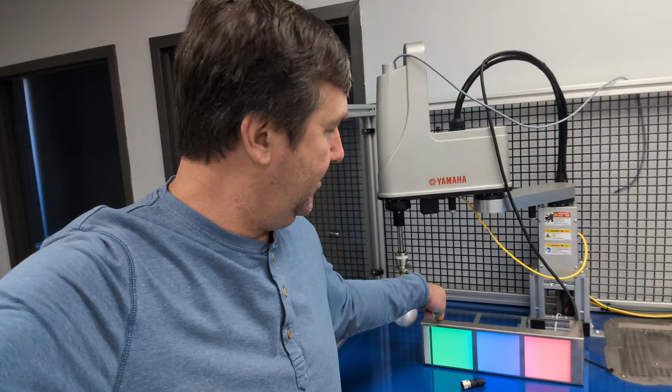So yeah, this is supposed to be an anodizing thing. Well, I guess it's supposed to be RGB, red, green, blue. Okay, I guess I don't have my order right, but I'll work that part out.

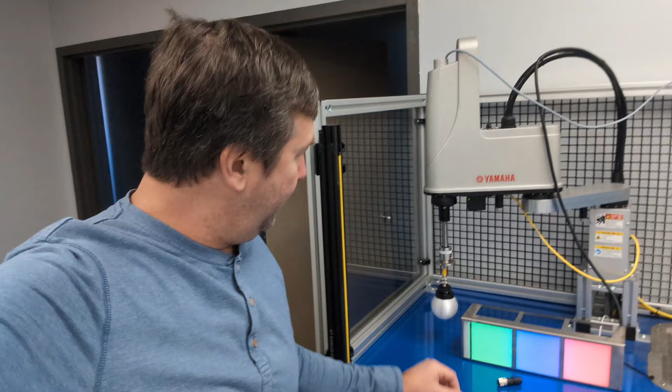I have a banner stack light kind of hanging off here, like it'll be a crane dipping something in. When it dips down into the green, it should turn green, and as you mix the colors, it will change. Later on, I thought we might even make it so if you dip it for a certain amount of time, it puts so much green into it, and a different amount in the next dip, so you can get true color variation. But right now, just trying to make it work.

And like everything we do here, you got to do it at least twice, because this part looks really good, looks like it's going to work, but we still finish parts with this.

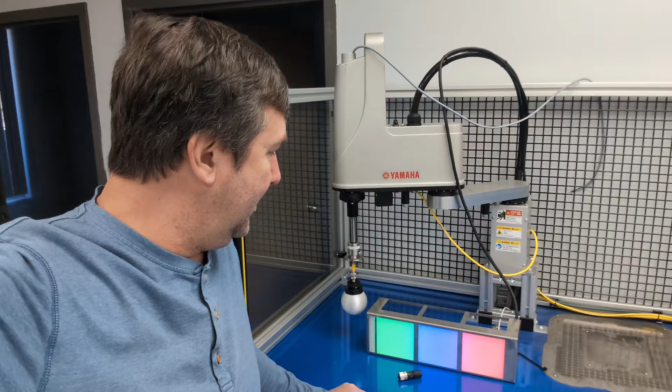So now I need to get this connector out of the way, and I can't. I need the world's smallest M12 connector, or world's smallest, but I don't think it exists. So for now I need to cut the cord off and manage to get this cable fished through.

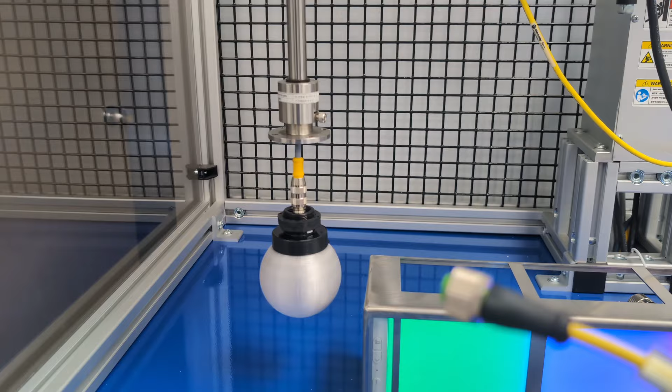That way we can just unwire this and shove it up and out of the way when we're not using it. We'll take a nice new molded cable and go ahead and sacrifice it.

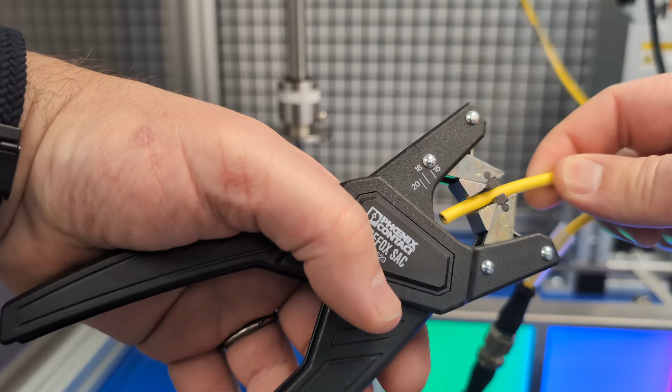I'll take my cable stripper, strip about yay much off of it. Then we were getting ready to go to the school of let's do everything twice, because I was getting ready to put the end on it, but I need to fish it through the robot first.

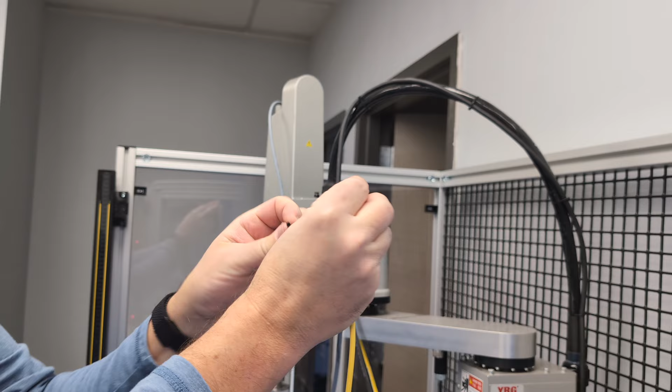So we'll take a little tape. Who knows, maybe this is in the camera, maybe it's not, but I'm hoping I can just put a little bit of tape on where the wires are stripped. That'll be nice and thin.

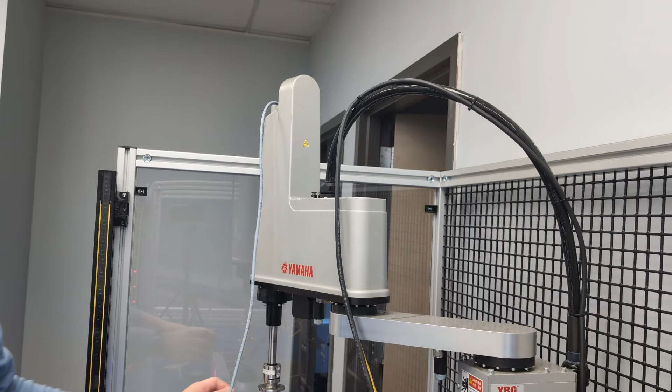And I should be able to grab this. Oh, we're gonna have to do it twice anyway. I'm gonna take the cover off of it because I put a tie wrap up here to keep it from falling through. Not thinking very far ahead.

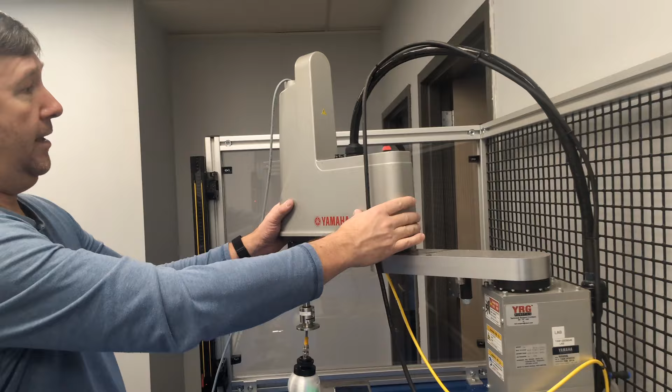So yeah, I'm gonna take the cover off of this, get to look at the inside of it, and then I can cut the tie wrap and fish it through. I should be able to slide this off now.

Well, there we go. Got that power cable on the way. Yeah, I did this tie wrap thinking that was a smart move, and now I realize it wasn't.

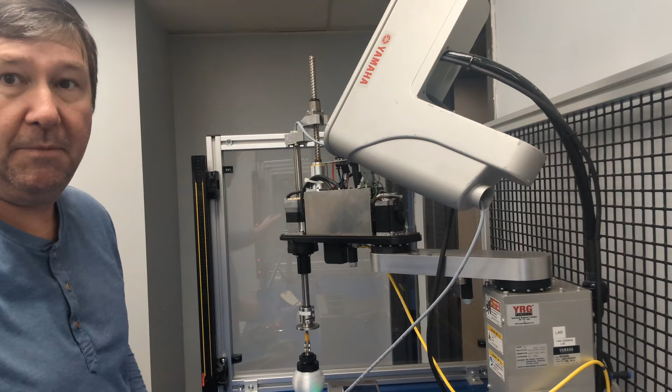Thinking about this in the future, because yeah, this probably will become a production trainer eventually. YRG has this pass-through, it gives you, I think, 15 wires, and probably that's where it needs to actually be done at, but I'm not sure what I'm doing yet, so we're going to do it this way.

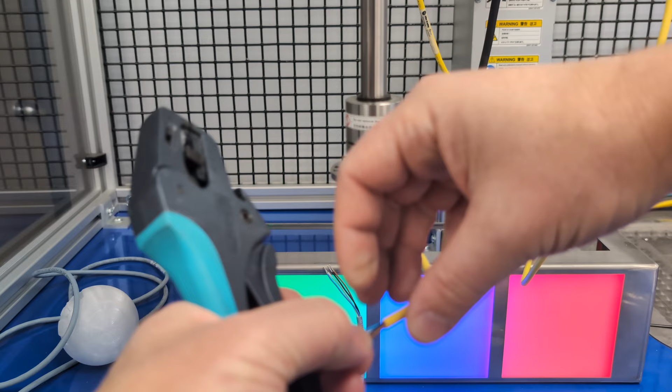Now, for either efficiency or an unplanned learning opportunity, you never know until you do it, I'm going to try to strip all 4 of these at the same time. There we go, there we go. All 4 of them stripped at the same time.

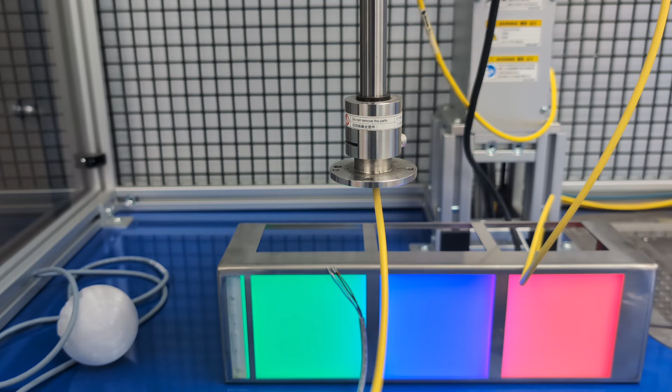And we'll slide this up on it. Of course, we should have done it before we stripped it, because now we got a lot of fray wires to fight. And gotta love these connectors.

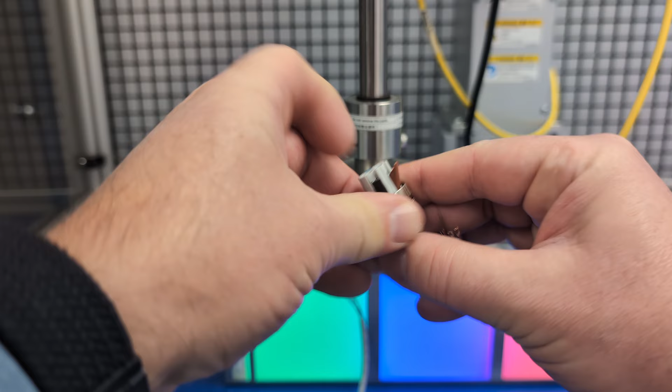We'll pop out the brown, the black, the blue, and while not used, we'll go ahead and do the white, that way it's at least terminated. And yeah, just slide them down in there and push in.

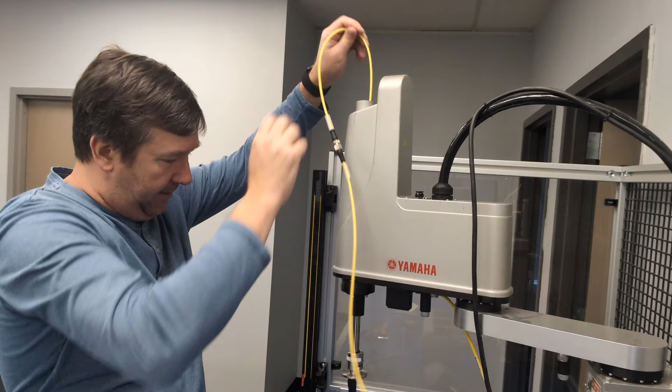And of course, I didn't think about needing some way to still hold this, but for now, because I bet you money we're gonna have this apart at least 3 more times this week, maybe today, we're gonna stick a couple tie wraps here. If it was really smart, I would use a reusable tie wrap right now.

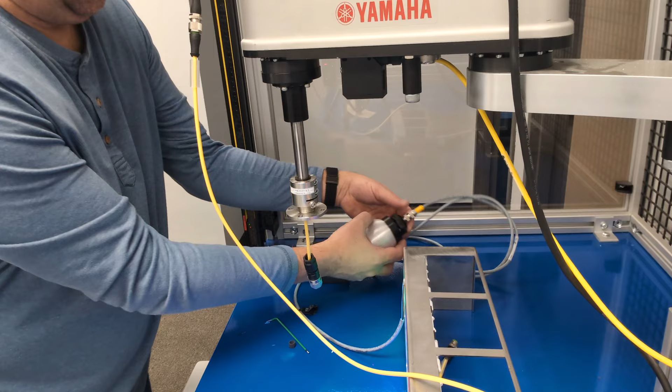And now we should be able to screw the part, which by the way, good job, Michael. Notice he even got the tie wrap in there. But yeah, we have our round part that actually embeds that banner light. We'll hang it down.

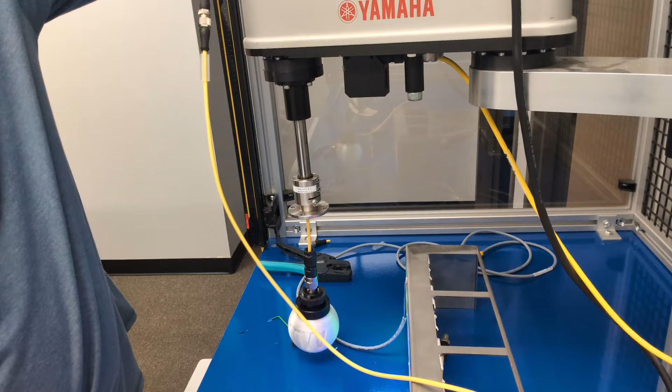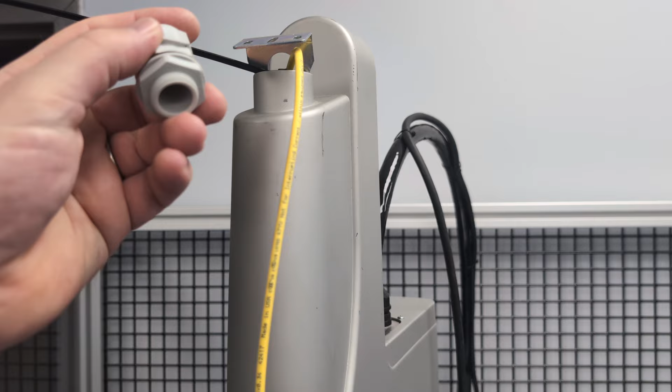Ooh, and already I realize this needs to be much higher. So already we're going to cut those tie wraps off that I just put on, and we'll do it again. And in hindsight, I should have put a cord grip in here. In one of the probably 5 times that we unwire this week for other reasons, I'll be sure to pop that in.

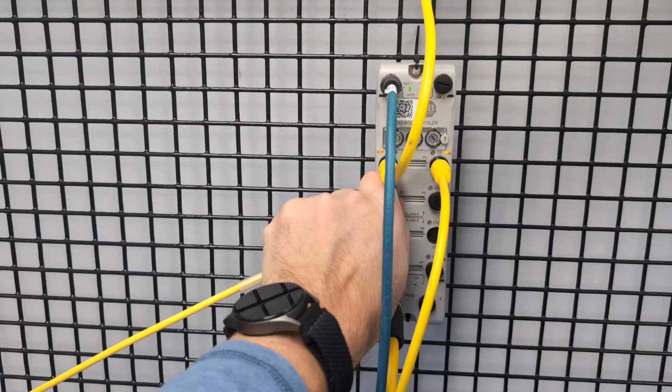And now I'm gonna plug this into port 1 of my 5032 module. Uh-oh, oh, those things are tight. Instead of going to get a screwdriver, I will just make my fingers hurt. And we'll go ahead and screw that in.

And while I was at Automation Fair, I did get a little clarification. A lot of us have kind of gripe that you can't add devices on the fly on the 5032 module. But if you think about it, when you look at the actual memory structure you get by using the 5032, where instead of having to go to some particular data cell to get that stack light color, you are adding all those memory points. So I get the feeling that's why. Another one they brought up was safety. I'm not sure which it is, but let's see if we can get this added.

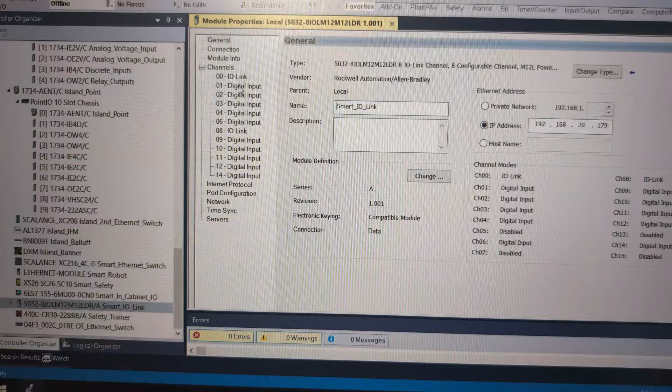And we're going to use that nice copy and paste feature, I hope. So actually, no, I'm not going to. Well, let's find out here. If I right click the EZ-LIGHT, because this is the one EZ-LIGHT, all I need to do is make a second one on port 1. Yeah, we can copy. Got a little swirly wheel, right click. Oh, can't paste. Well, that's right. We got to double click on the module, the 5032 properties. Don't want to check. Is it change there? Ah, that's not quite intuitive, but yeah.

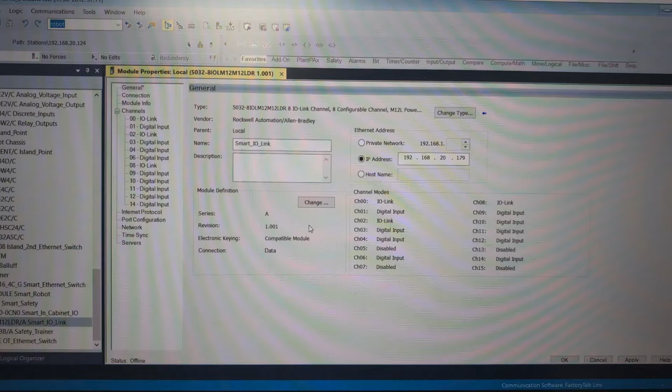So I was thinking the change here had mainly to do with the revision and everything, but it looks like this is a separate area. Yeah, we click change there. And then port 1, we're going to make it an IO link port. Click OK. You're going to get a little warning that I probably should have read. But now, can we right click IO link? First of all, we have new module, but secondly, more importantly, we have paste. So I'm going to just try to paste that. And it came up as 2. Why did you come up as 2 when I thought I put port 1?

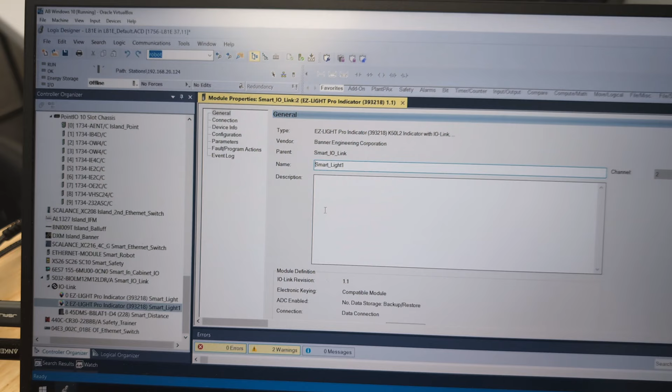That's right, I have to remember, it is port 1, but here it says C2. That's what it's going off of, because right now I'm using 0 and 8. And I'm going to call this the anodizing light. I'm going to Google how to spell anodizing. And now we should be able to download that. So communications, who active.

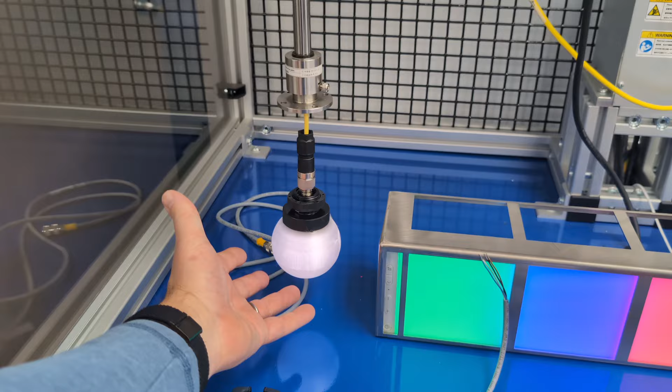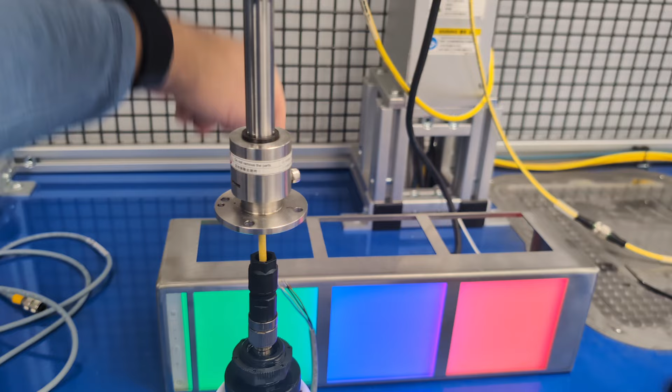And we'll download. So then I'm gonna have to make it where the robot picks it up, to simulate that it's picking it up. I'm not gonna dip it into here, but I'm just gonna move it over. So here, it'll be above this square and it should dip down into that square. I will turn it green. And then when we dip it in the blue, we'll have to blend the colors.

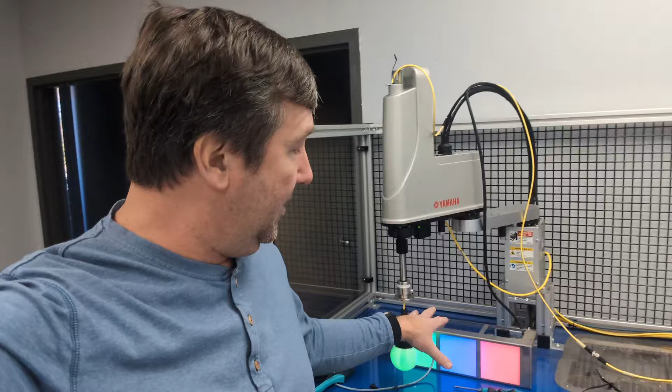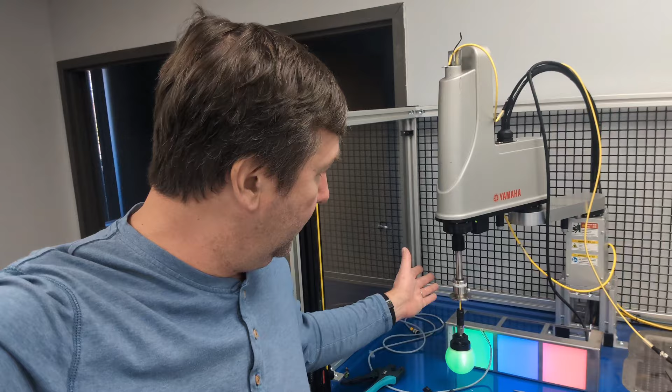So in the end, the goal will be, one, this just represents a process going on. But then we'll also have orders in there. So maybe order number 1, 2, 3 is going to be just green. And then maybe 1, 2, 4 will be blue. And then 1, 2, 5 is a mixture of green and blue, which I don't know what green and blue make, but I'll figure it out. So that's kind of hopefully the goal.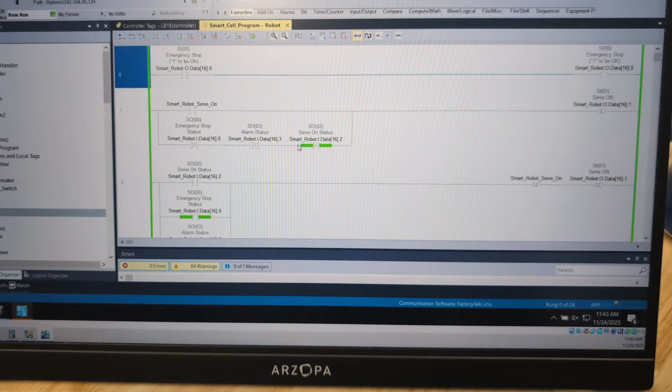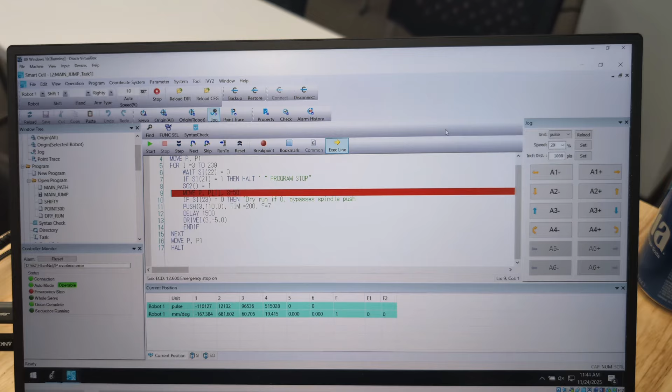So now I got to figure out, okay, I got a couple items. I got to program the moves, and I want to do the moves differently in this one. So already in our Smart Cell program, if we go to the robot routine, then currently we are using the execute program. So what this is doing is it's just passing the program start over to the RCX software by Yamaha. And in this case, we're just running this one program. And this is really good because we have like 300 points to run.

The other cool feature that my buddy over at Yamaha, Chris Elston, everybody knows him, Mr. PLC, did is he realized a lot of us are PLC programmers, not really code line programmers. So directly in ladder logic, you can tell it to go to this position. I think that's what I want to do on this one, because part of what we do in this training is try to sprinkle in different things you can do.

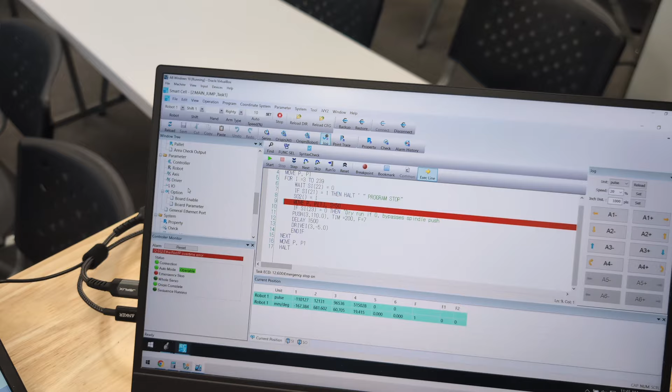We already have an example of a really involved point program, and in those cases you cannot beat this way, mainly because if I can figure out where the points are... there's somewhere in here, I'm a little rusty on this, I need to get in here and play with this. If Chris Elston's watching, he's probably screaming at me saying it's right there. There we go. If we go to the point program, in this case we can copy and paste out of Excel, and for this many points, you can't beat that.

But in this one, I think I'm going to use a two-dimensional array and go ahead and put my coordinates into Studio, so we can show how you could have everything in Studio, and we'll run this one that way.

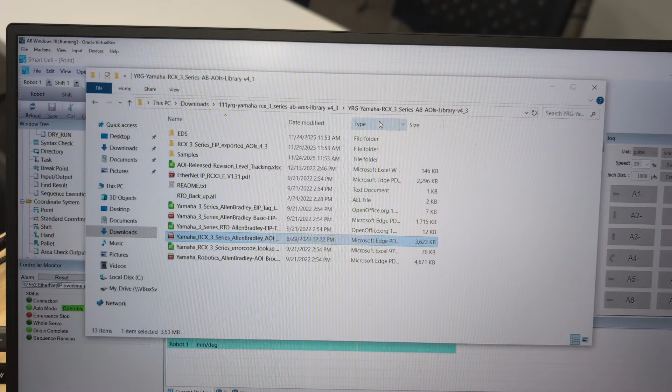Over on YRG Inc.'s site, they have a really good add-on instruction library. In fact, here's all the add-on instructions, a bunch of them. But let's go back up here, and I think it's this one. Let's go into here.

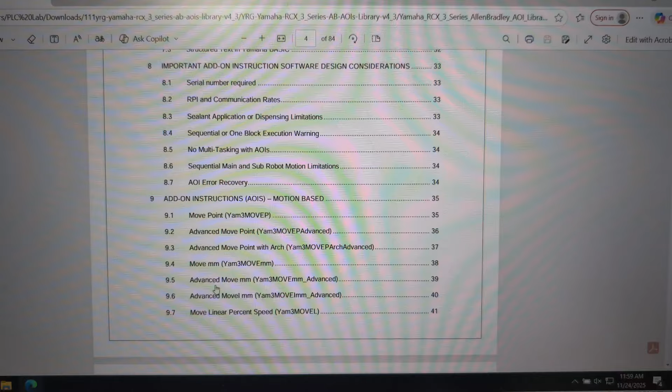Yes, so we want to move - I don't want to move point, that's kind of what we're already doing, we're running a program to do that. Advanced move point, move millimeter - here's where I may have to call Chris. I don't know if I want to move millimeter, move advanced millimeter, or move - oh, now I got too many choices. Let's just go check one of them out there.

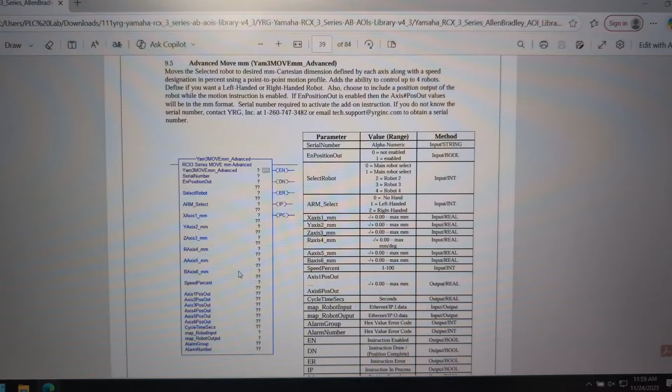Yeah, so here's what I want to be able to do: we're going to feed these in through an array depending on where we want it to go. So yeah, need to figure out how to work that out.

Got to borrow Amber's car to go get a haircut. You know, nothing keeps you limber for crawling under a machine like trying to fight your way into your wife's car who was a foot shorter than you. Now, if AI was really good, I could stare at this screen, snap my fingers, and haircut done. Better stick to PLC programming.

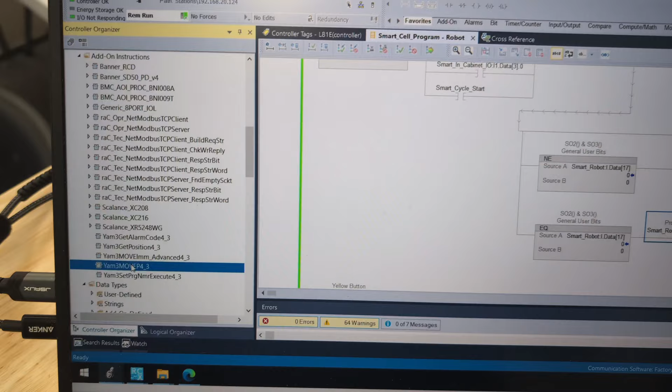That wasn't really good. So I don't have this one in here, so we're going to import it in. I'm going to right-click Add-on Instructions, Import. The Yam3MOVEmm, I think that one's it. We're going to go ahead and bring that thing in.

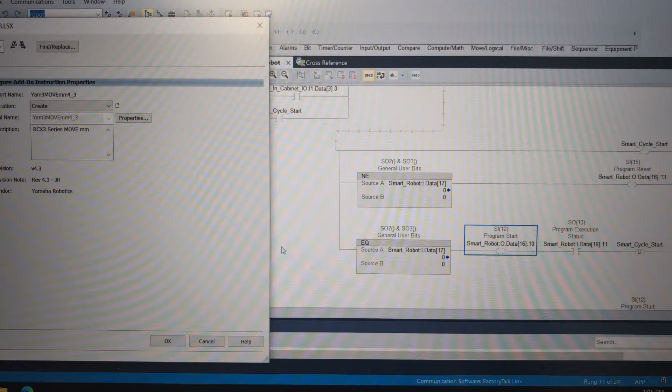Okay, probably should have read the instructions, but we're just going to go for it. All right, I already have a move here to move to a specific point, but what I want to do is move to a position. So we're going to go ahead and bring a new rung down right beneath it.

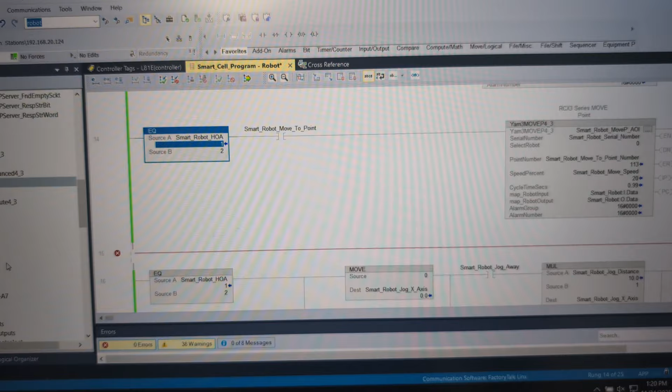Let's see, we're going to go find the AOI. Oops, apparently I scrolled - did I close it? Nope, still highlighted. So if you didn't know, you can actually drag these in from the left side too. We're going to drop that one there, and then I'm going to fill out some tags.

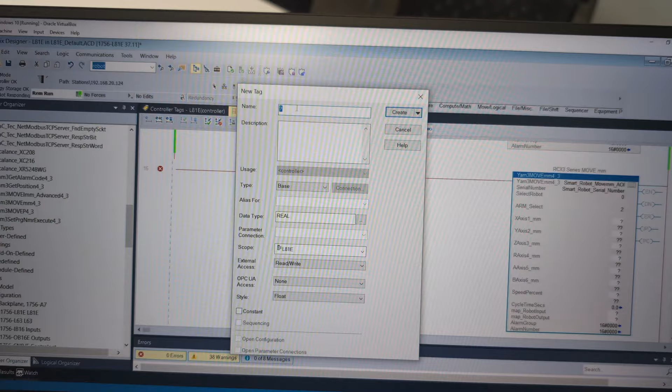Now I'm not 100% sure what I need here for these axes yet, so I'm going to create an array. Let's go ahead and right click there, new tag, and I'm going to call this my anodizing positions. This is going to be a real data type, but I'm going to hit the dialog box to the right of it. And so I know I need 4 positions.

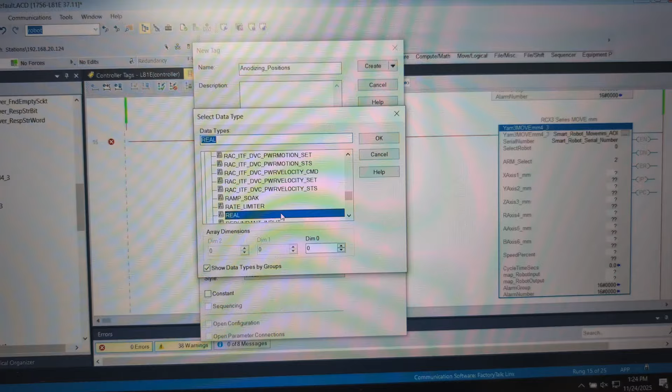We're not actually using the 5th and the 6th one here, I can put zeros on those over here. But I'm going to use 4, and then I know I need a color. And then I feel like I might need something else, and I don't want to have to re-download - we can always clean it up later. I'm going to make this a dim 0 of 6, that'll give me 1 extra spot, and when we do that, dim 1 comes available.

Now I got to think through my positions. Whoops, put my hand in the light curtain. But so we have our empty position, then we're going to raise up. So that'll be 0, 1, 2, 3.

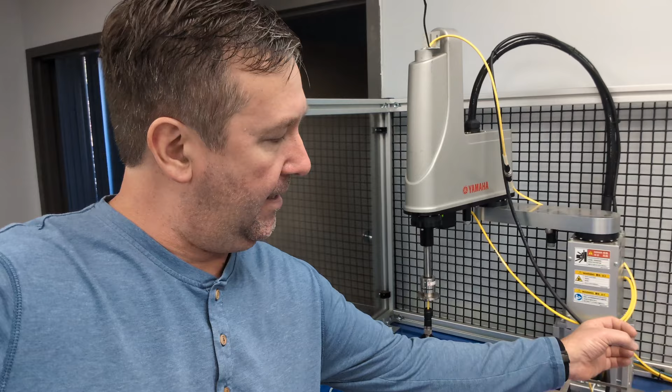I'll go back to 3, but I'm going to make this 4, 5, 6, 7, 8, 9, 10, 11, 12, 13, 14. That's 15 total. I'm going to make it 20. So dim 1 will be 20.

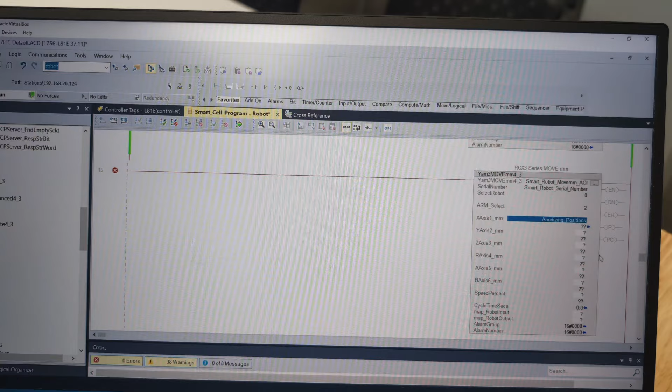We'll work with that later, but this gives us a starting point. We're going to create that, and for this one, for now, I'm going to put in anodizing positions 0, 0. Actually, we'll make 0 the color, because that'll help us keep track of where we're at. I guess it doesn't matter, but yeah.

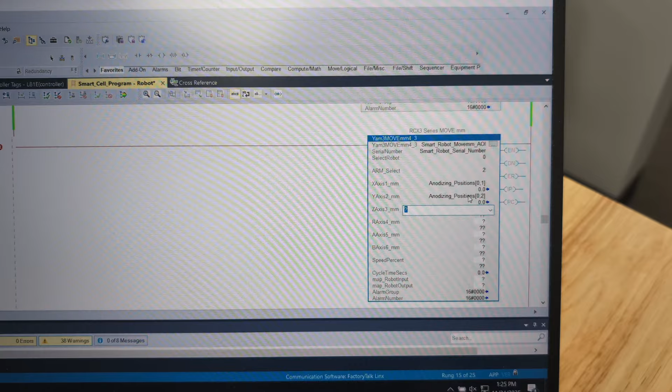And then the next one we're gonna make 1, or no, we'll make 2. And then the next one we'll make 3. And the next one we'll make 4. And then the 5th one, I'm just going to put a 0 in. I think a 0 will work fine there, and a 0 will work fine there.

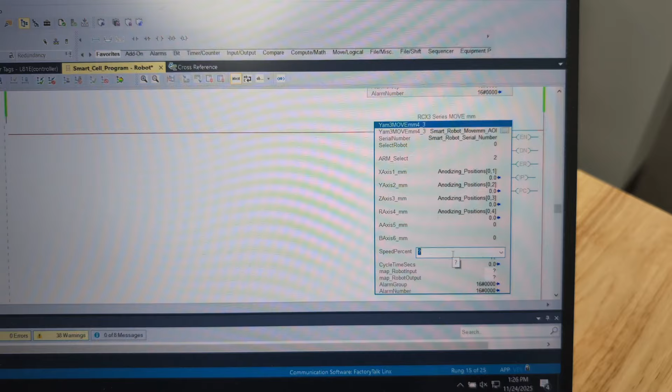Now we do need a speed, and there you go. I probably should have put a speed in there, but I'm just going to make a tag called anodizing speed. We'll right-click that, new. And it says that needs to be an integer.

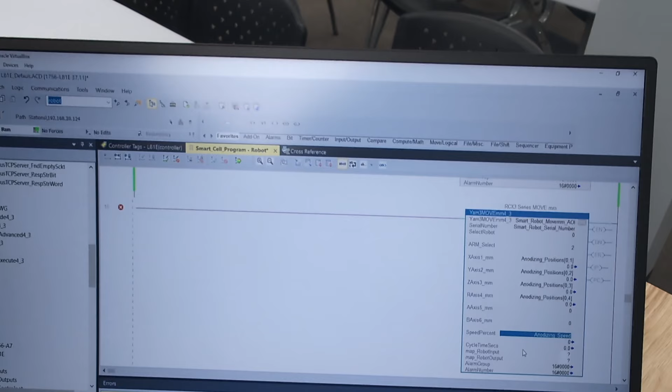And then we got our map robot inputs and outputs, which I already can grab the instruction right above it. So we'll grab that one. All right, so now this instruction's happy. I'm not even sure how we're going to drive this instruction yet, I'm just trying to figure out how to even do any of this. So I'm just going to put this in as, and by the end of this video I'm going to figure out how to spell anodizing, so anodizing test move. That'll get us to where we should be able to do something.

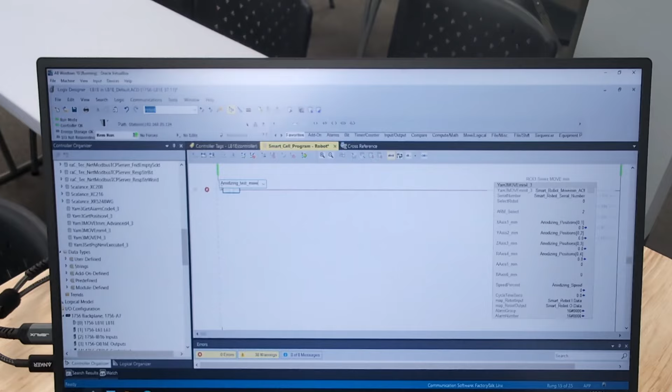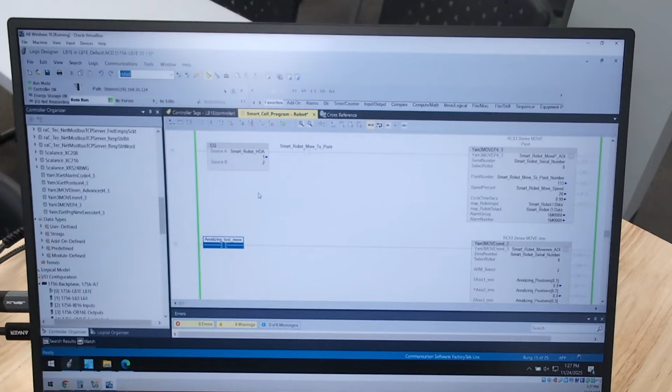Now I need some positions, and I actually already have another instruction in here which I need to revise. They have a really cool RTO feature in here now that I don't even need to use some of these add-on instructions. But we go down here to rung 21-ish. We're sequencing through getting some alarms and some various things, and here is our current position. So I should be able to put these rough values in and get to this exact value.

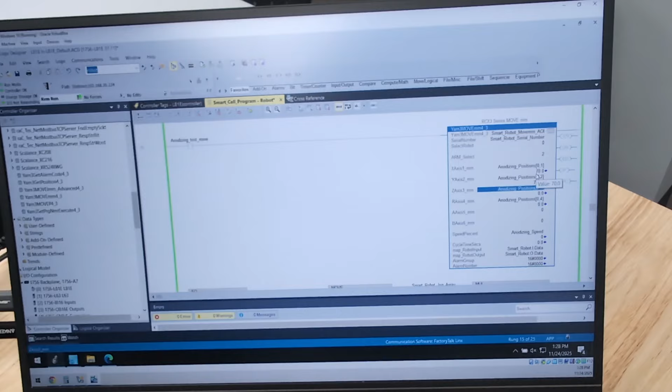So we're going to say 70, 765, we'll call that 60, and 130. So we're going to make this one 70, and then 765, 60, and 130. And then when we toggle this, we should see the robot move to the exact position. And just in case I really screw up, let's look this way while we toggle it.

Well, and it didn't do anything. And that's because it's going to do exactly what you tell it to do, and it is trying to go there with a speed of 0. That is never going to work.

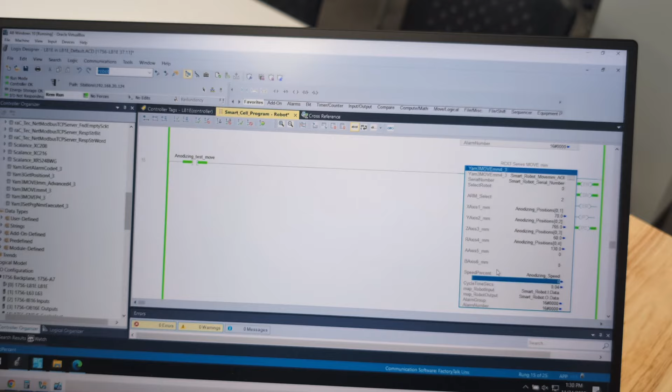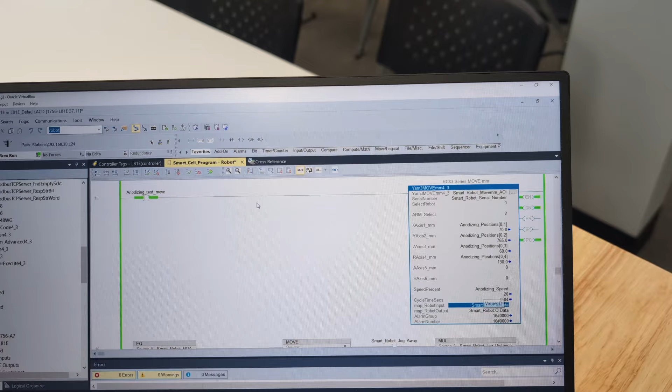So now the question is, what speed do we normally run? I don't know, but looks like on this earlier test we were moving at 20. So we're going to put a speed of 20 in here. And then we toggle it. It works a lot better when you give it a speed.

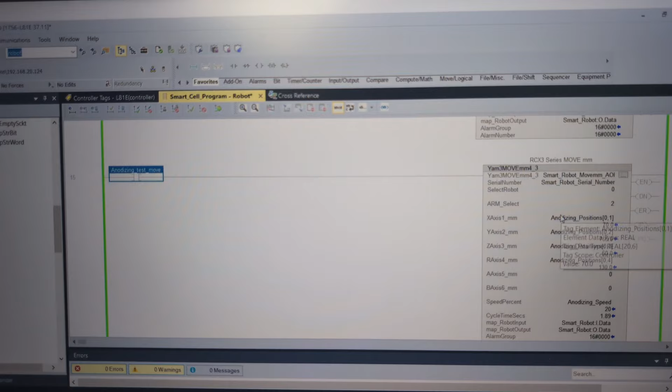So I put these in as fixed numbers. So already now that we have 1 down, now we need to go to the next position. But okay, so now we're going to index through a value here to figure the rest of this out. That way we can actually test the positions. So we're going to start a rung edit here.

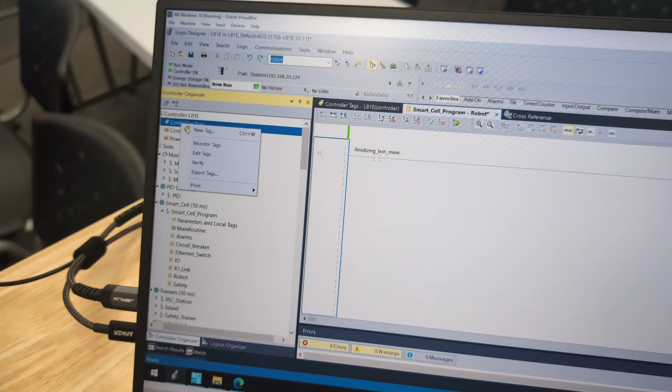And actually before we do that, if you didn't know, anywhere on your rung, like if I even clicked over here, you can hit Control W to create a tag, or we can go over here in the left pane, right click, and there's that Control W shortcut. We're going to create a tag, and we're going to call this one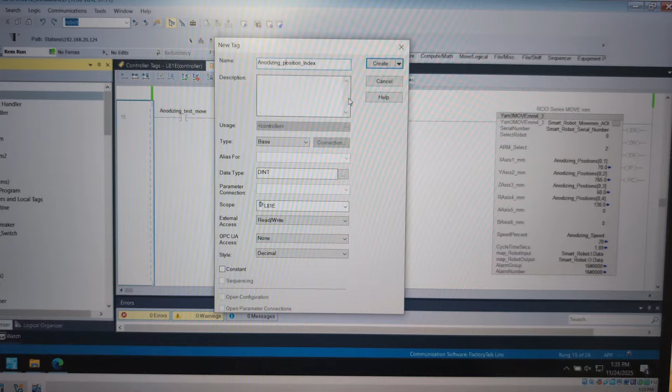anodizing - oh, I should have called it the paint tank, I could have spelled paint - anodizing. This will be our position index. Double integer will be fine on that. Let me get a capital P right there. Yeah, I can type faster, but I'm holding the phone with the other hand. And so we create that.

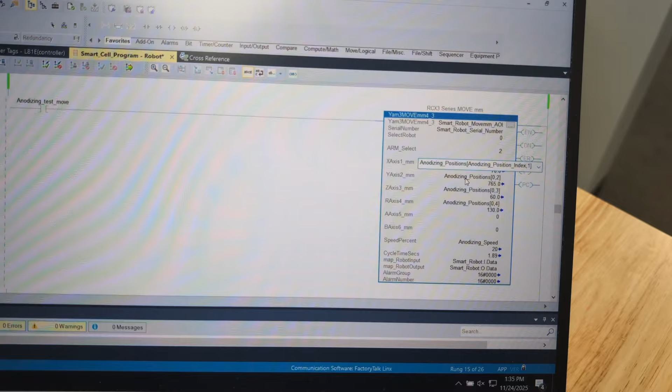We're going to double click on this one, and we're going to put in place of that 0... oh, why does the paste not work? Oh no. Paste - there it goes. Well, that was weird, I couldn't control V it. But okay, so what this is going to do is substitute whatever number I have here. That's going to let us start working through our positions.

So take that one out, which I should have thought through - man, that's a tough aim there. Paste that one, do it a couple more times. I don't need to be bored with that, I'm going to hit the pause button.

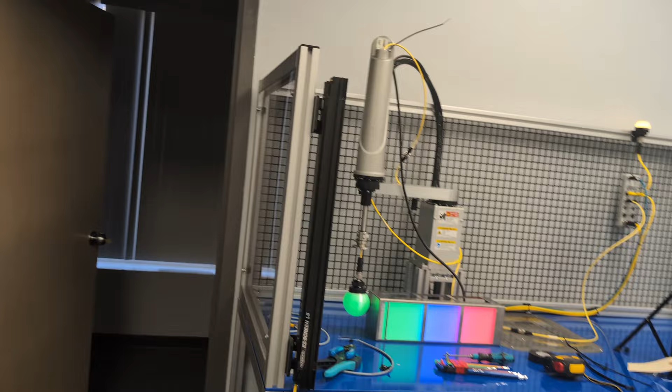So we're going to go back over to our RCX Studio, and we're just going to use the jog, and we're going to bring A3 up. So I just wanted where it's going to clear that. Oh no, it doesn't work. Oh, darn, safety reset got me again.

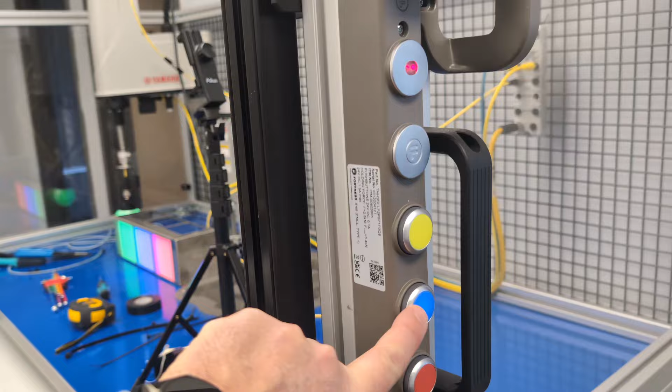There we go, we'll come over here and try it again. Oh, look at that, it even tells us your e-stop is on. Yeah, it was, thanks for telling me.

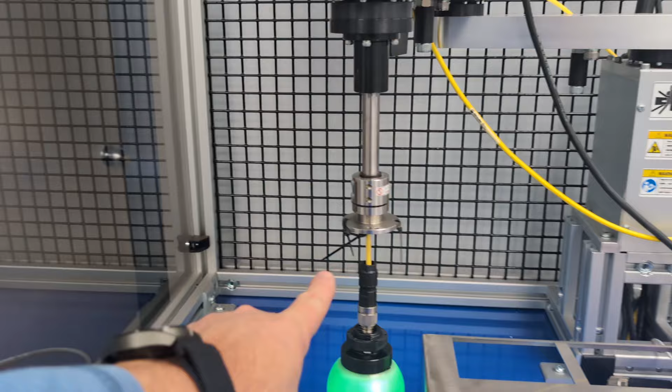Now if we retract that... oh no. Well, I didn't think this through well. It did retract, but this piece needs to be coupled to this, not up here. In the end, I'll get Michael to make some type of cord set to do that.

There's our nice fine mount. And now when we retract it, oh yeah, that looks much better. Oops, except for it slipped.

Now we did some fancy pants sequencing logic here, and if everything works right, no reason not to record it on our first trial. When we go anodizing run process one, the light should turn white right away. Oh okay, well there's our first problem, the light did not turn white. Although on this camera it almost looks white, but that is green.

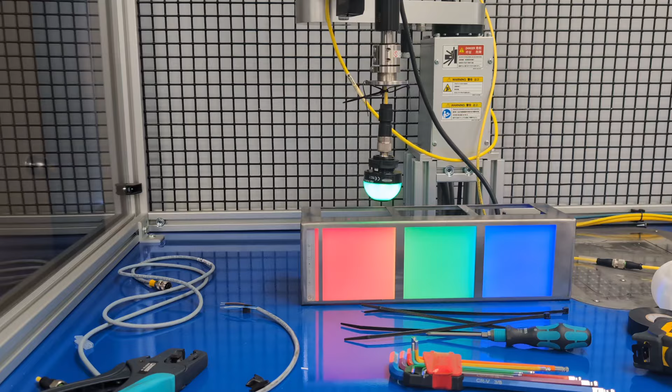I should come over here. Oh yeah, that totally screwed up my light. Yeah, I'd say that light is not working at all. What did I do wrong?

Well, look at the rest of it though, folks, kind of looks like it's almost doing what it's supposed to do. Definitely need a little more speed on that probably. What do you think, Mary Bruce? Yes, yeah, we'll speed it up in the next one.

Now let's see if it actually comes over here. It should kind of act like it's dropping a part off. And actually at the end of that, the light should go out and then it'll pick up, and that is the end of that cycle, and it should come back over here and be ready for the next cycle.

Yeah, we need a little more speed to get a little bit of excitement out of that. Between there's a lot of dwell time to think about things.

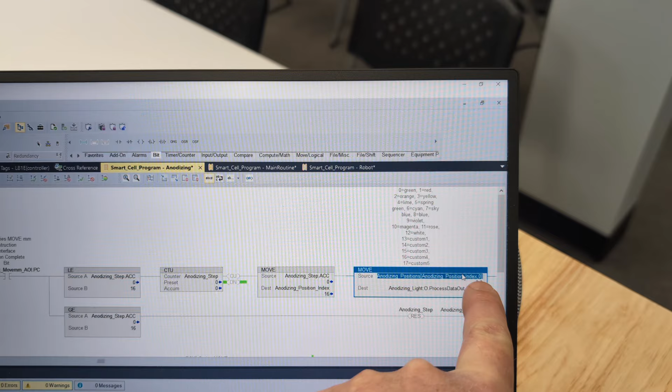All right, found a nice copy and paste error. That was supposed to be position 0 of our index. I had it as position 2. And then, yeah, let's see if we can go ahead and speed this up a little bit. We're at 20, well let's go ahead and make it 50.

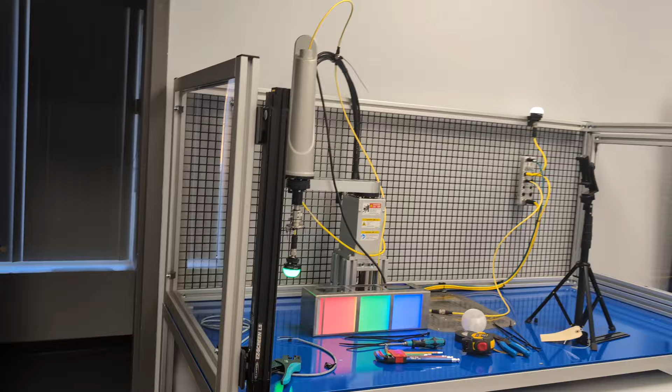I get a nice little giggle from Mary Bruce because she knows that chances are we're getting ready to do something really dumb, but you know, why not go ahead and record it and put it on YouTube? So now we'll try it.

Oh, it's definitely going to the wrong place. I don't even know where it's going now. Let's just watch it. Yeah, we might need to stop that. Yep, oh there it goes. All right, so we got one craziness going on.

I'm not sure, but hey, look, we got a white light now. Look at that, okay, yep, see, red in the wrong spot. Oh, I'm off by one the whole time.

Okay, got a little work to do on my timing. Actually, that's a little fast, I gotta admit. That's gonna be hard to talk out. And I don't know where the first position is, but definitely gotta find it.

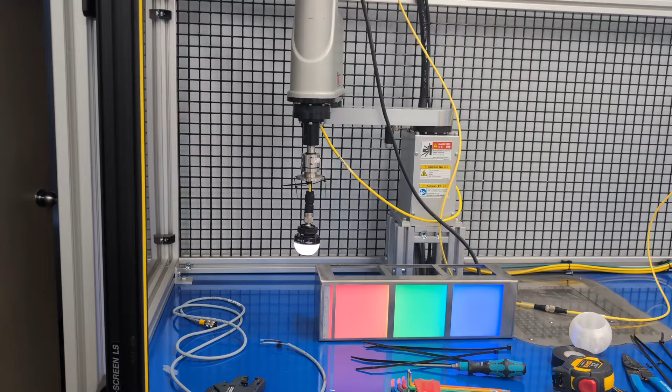Okay, I think we've got the initial part. Now, in the end, I've gotta make it where you dip it into red and green and it makes brown. Brown, or is it yellow? She's the art major, she's probably right. But we got to figure all that out.

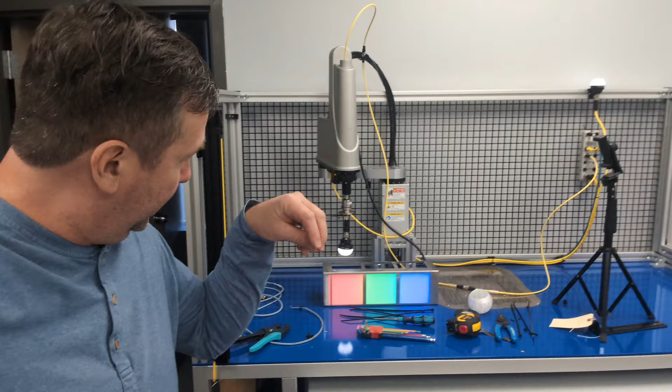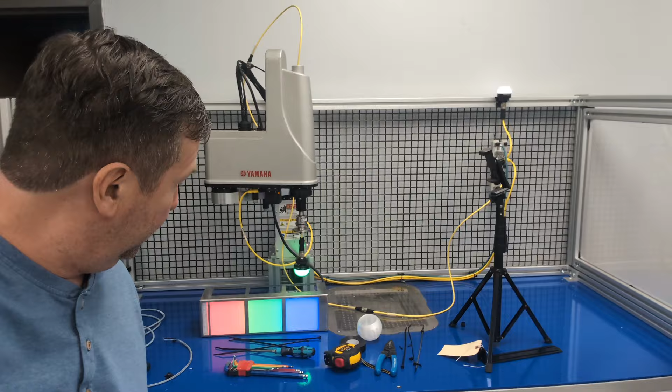But for now, just to represent our process, if we toggle that run process, it's going to come down. It's going to light up to tell us that it's picked the part up. Comes over, and if it dips it into the red, it'll turn red. And if it dips it into the green, it'll turn green. And if it dips it into the blue, it'll turn blue. And then just to represent us going over and dropping the part off, it comes over here, light turns off, and it's ready to do it again.